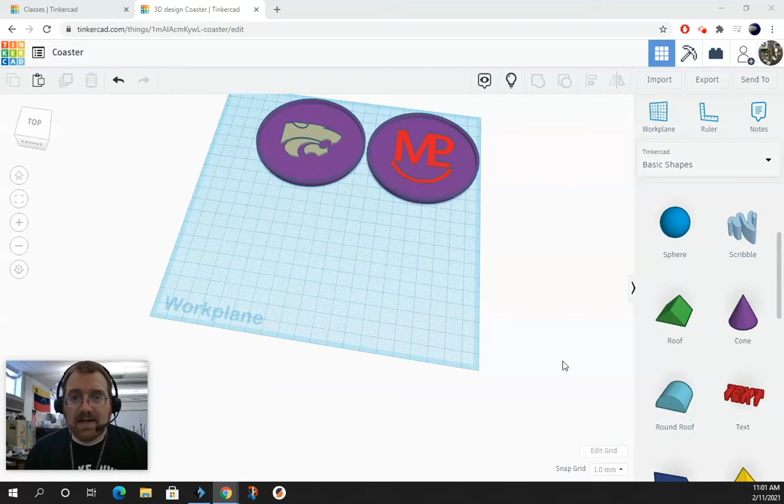You can see I have a couple examples up here, different ones that I made. One for my school where we are the Panthers, another one for Marshall Public Library, friends who help me. Anyways, we're going to start.

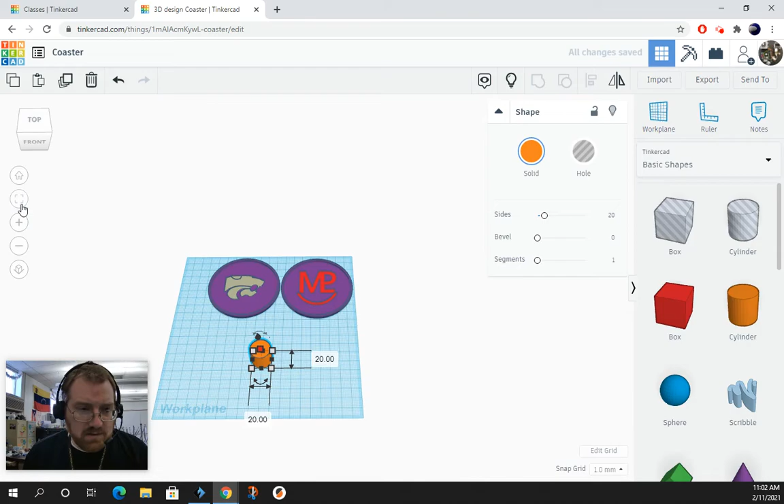A lot of students think it would be really easy to make a coaster, that you basically take a cylinder, smash it flat, and spread it out. Couple problems with that. I want to make some coasters that are stackable because it's always easier if they stack. So I'm actually going to delete that.

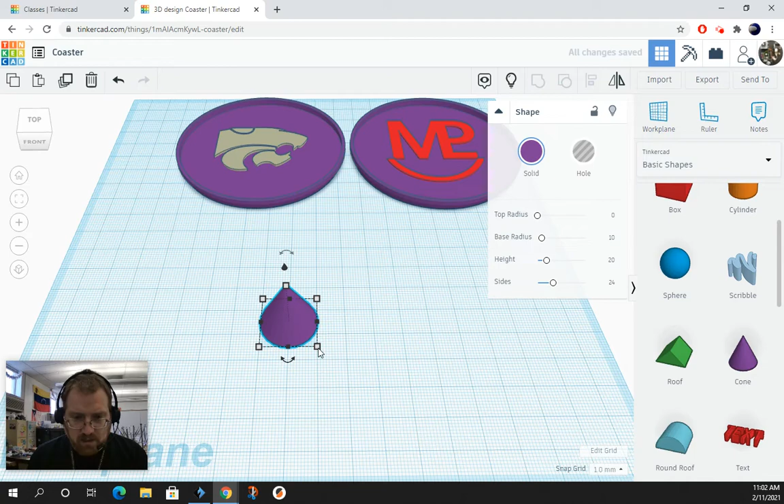What we're going to start with is a cone. Now, with this cone, I am going to take it and size it up. Part of it is however big I want it. So if you have a certain bottle or certain cups you want it for, you can size it specifically for them. Let's look at these ones, these ones are at 80, so yeah, I think I'm going to go up to 80 on these ones.

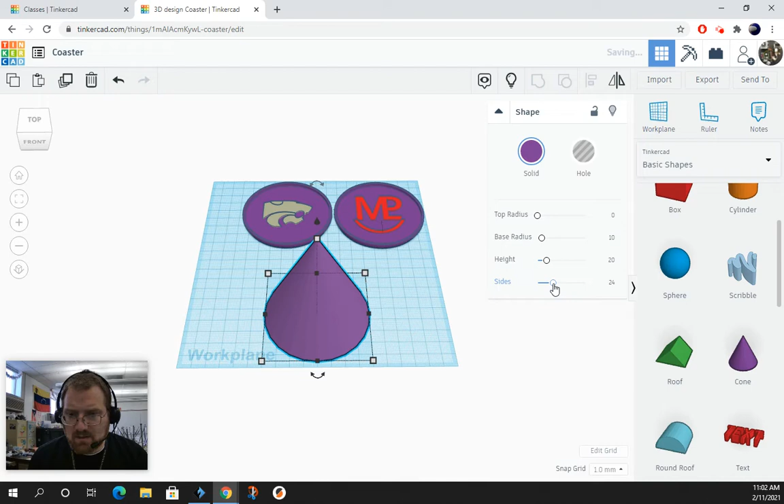One thing I want to do is make this as smooth around as I can, so I'm going to give it more sides. That makes it a fairly pretty cone and everything. And I'm actually going to take this for now, and put that at 160.

Okay, now you're saying that does not look like a coaster. You are correct, that does not look like a coaster, but part of it is I'm not done yet.

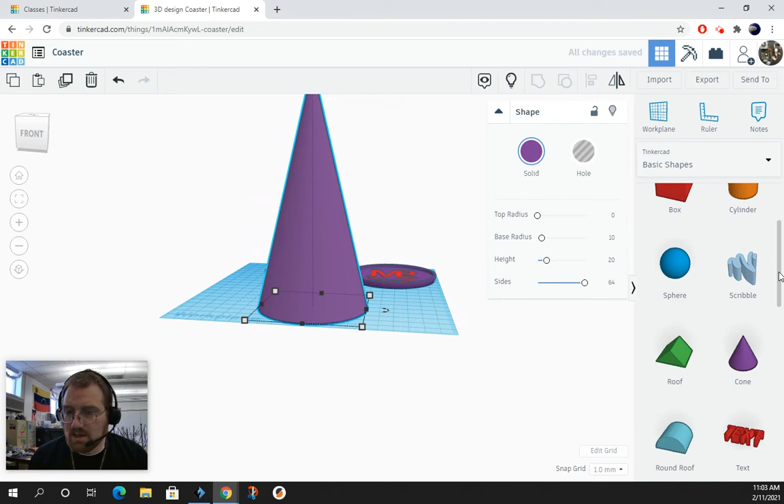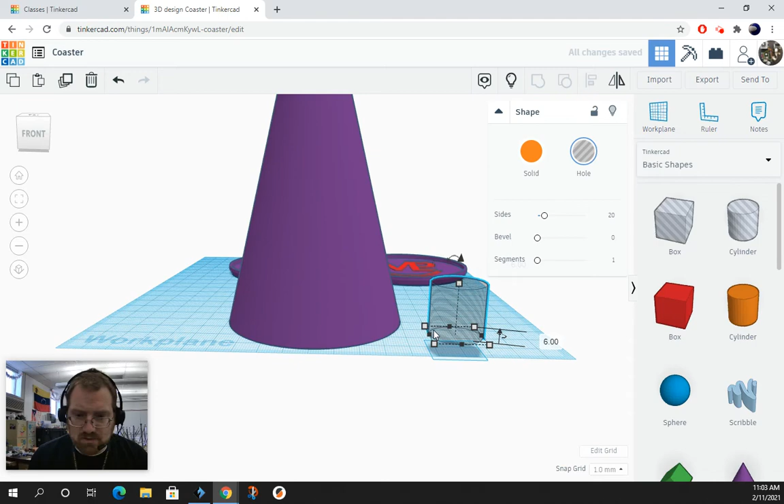One of the great things about using Tinkercad is you can create new shapes by adding shapes. So what I'm going to do here is take this cylinder right here, click on the black caret above it, and lift it up. About 5 or 6 millimeters is about how thick you want your coasters. And I'm going to move it over my cone like this.

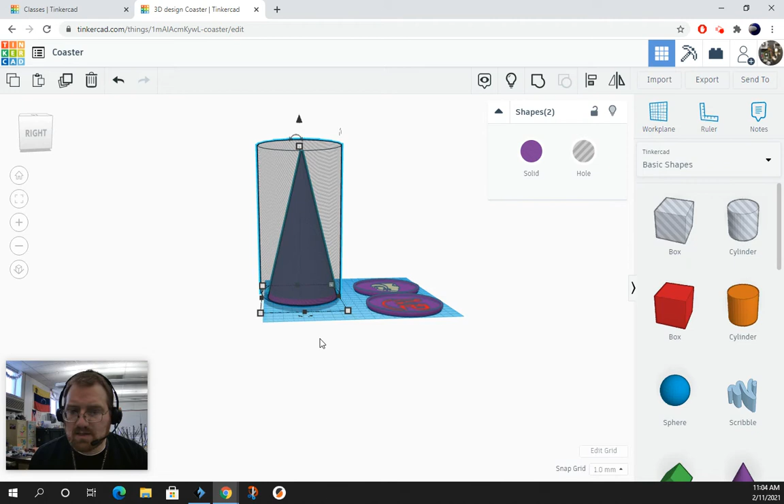If you remember, I made that 160, so I can make this 160 as well. I can zoom back and see that it covers it completely. Now I'm going to take those two shapes, the cone and the cylinder I just made, that is a hole. And now I'm going to group them. I could also hit Control G. So now that I group them, I have this new shape.

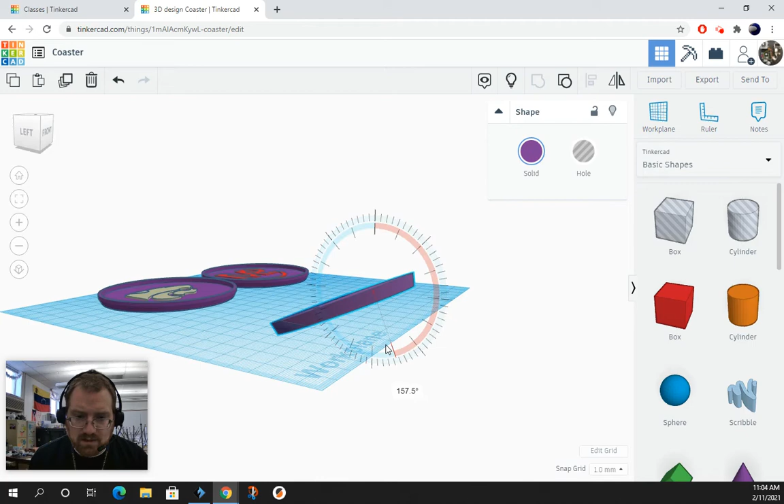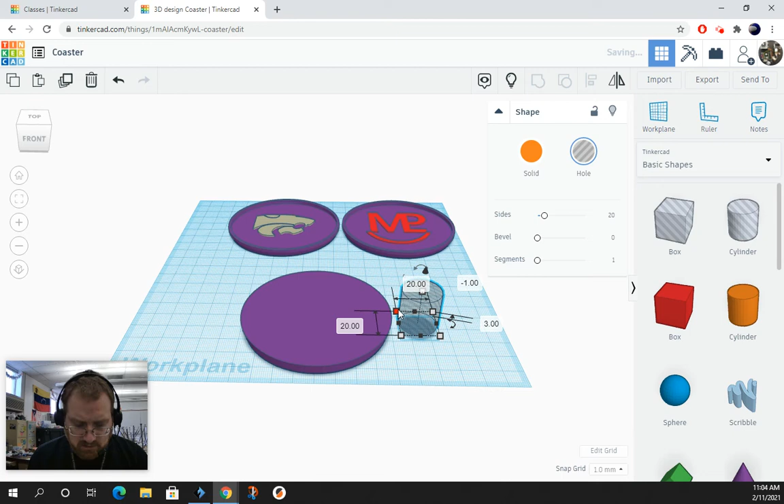Now that's looking more like a coaster, and the only thing we need to do is have a hole in it. Now we could do one of two things. We could take a cylinder like this, and depending on how much we want it up in the air, how much space, we can do this. I'm doing this so it does it proportionally, hitting shift. Now it's 80, the other one is 80 millimeters around.

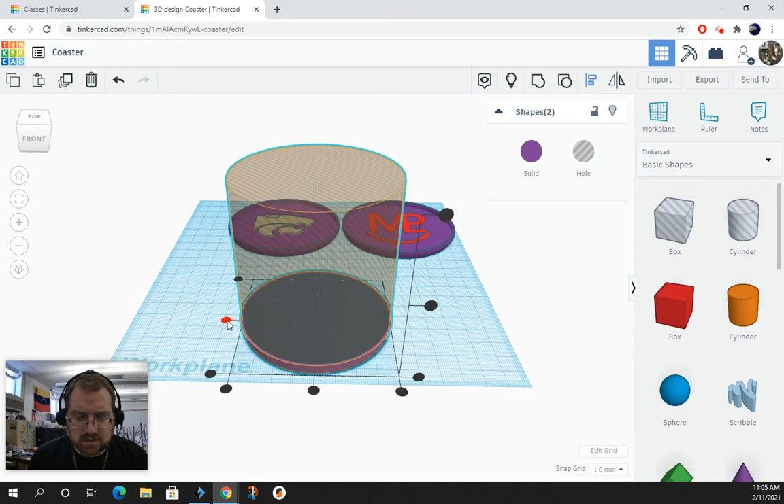So if I do this, one thing I forgot, I want to turn my sides up, make it pretty smooth. Okay, use my alignment tool, make sure it's perfectly aligned. And now I can group that. One thing to be aware of is you could accidentally have the cylinder come out here on the sides, and that would ruin your coaster. But here we have the beginnings of a coaster.

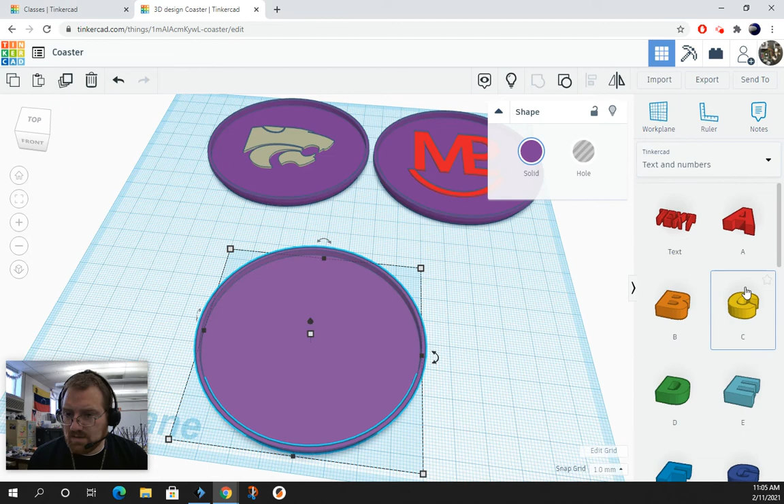Pretty easy. You can now decorate it with other things. You can turn around and put letters and stuff in. You can put the letters in as holes, and that way you can customize your coaster and have some really awesome coasters.